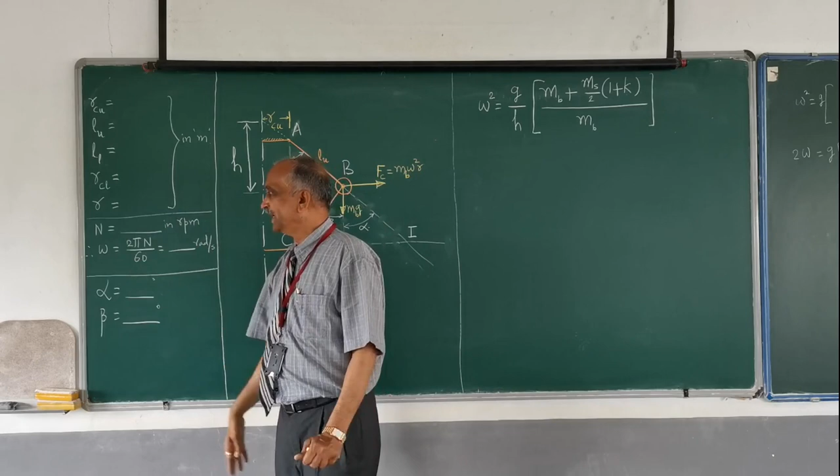I'd also like to explain how we can solve a problem in general, without specific values. I expect you all to write the given values when solving a problem in terms of meters. N is in RPM, it may be given or asked, and the relationship between N and omega is as you all know, represented this way.

You also have two angles, alpha and beta. Alpha is the angle made by the upper arm with the spindle axis. Similarly, beta is the angle made by the lower arm with the spindle axis. So if the length of the upper arm and lower arm, and RCU and RCL, are equal, then alpha is going to be equal to beta.

But I'd like to make this analysis as general as possible, so I assume all of them are different. When you start solving a problem, it may often happen that LU equals LL, RCU equals RCL, etc. In that case alpha equals beta. Don't worry about it.

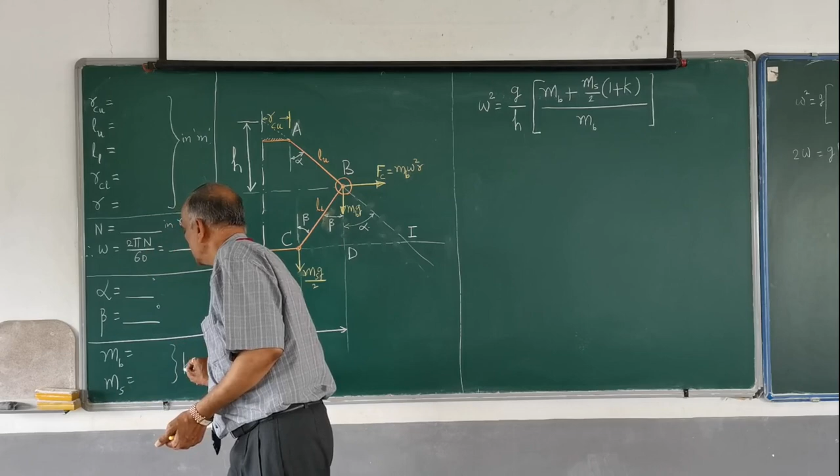In addition to this, you also have what's called mb, the mass of each ball, and what's called the mass of the sleeve, ms. Both of these are in terms of kg.

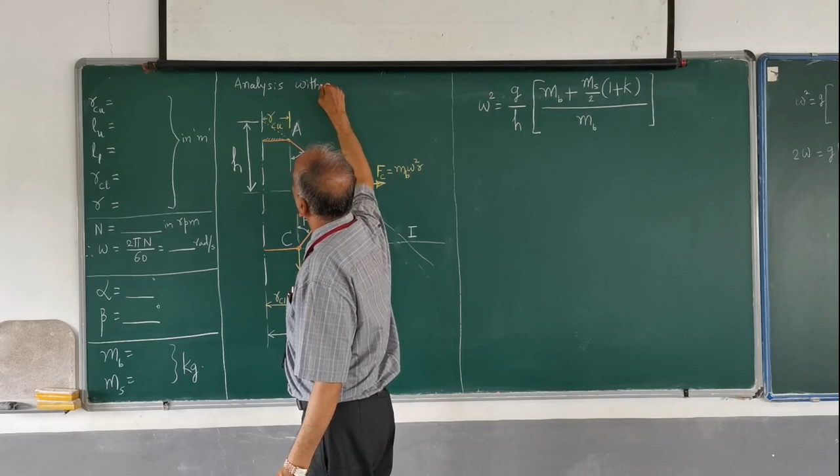Whatever the analysis, this is what I'm calling analysis of a governor without friction. So I am not considering friction right now, and if I don't take it into account, how the analysis is to be carried out - that's what I want to demonstrate.

Along with this, I've also shown the various forces that act. You have a force called centrifugal force, which is equal to m into omega square into r. Then you have the weight of the ball acting vertically downwards, equal to m into g. Then you have the sleeve, of mass ms, and the weight of the sleeve is ms into g, which is imagined to be acting at the axis.

I want to resolve this into two parts, one component here and another component here, and I can imagine that these two components are equal, and that is equal to Ms into G divided by 2. So this is the sleeve force weight, this is the weight of the ball, and this is the centrifugal force. So these three forces are acting, and under these three forces these balls are revolving at a constant radius r.

These balls, with respect to the horizontal movement in the plane of rotation, are constant, fixed in the sense that this R value is not changing, and therefore I can say that it is in the equilibrium state, and I would like to apply the equilibrium condition.

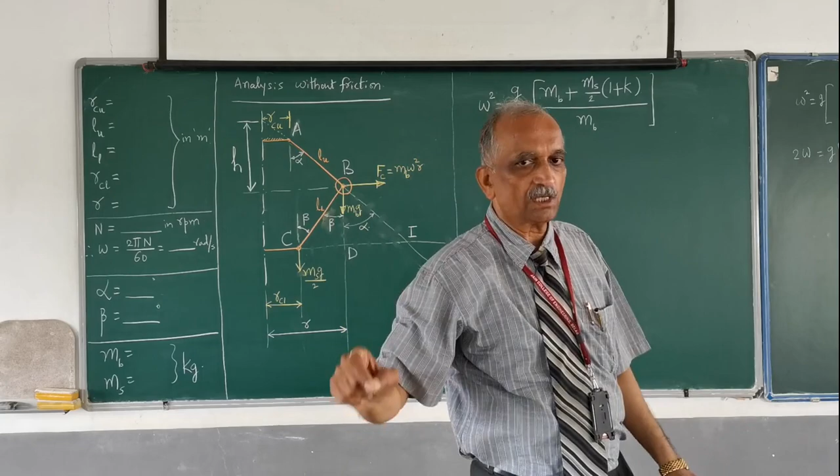So what is the height of the governor? You cannot measure it directly, it has to be calculated. As per the definition, the height of the governor is nothing but the distance of the intersection of the upper arm with the spindle axis. That is nothing but this point. You have the upper arm here, you extend it till it intersects, and this is the point. The distance of this point from the plane of rotation of the balls is what is called H, the height of the governor.

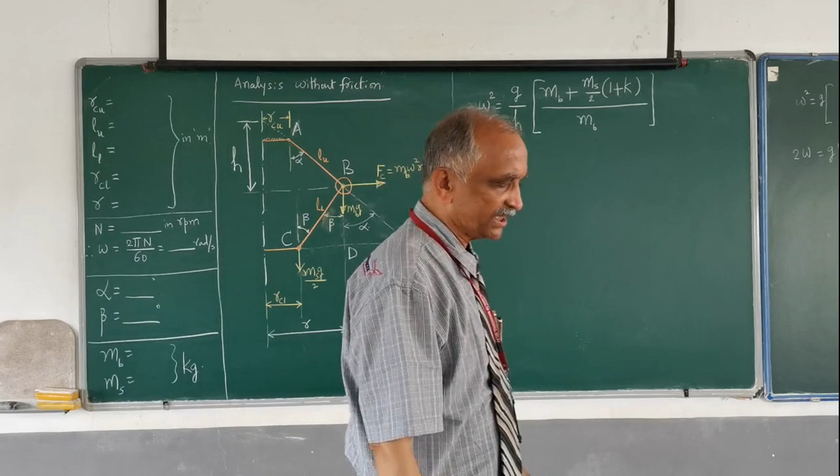So this is how we have got the relation between omega and H and Mb, Ms, etc. I don't intend for you to use this ready-made expression for every numerical problem; you can analyze it this way. But even if you use it as a ready-made formula, please remember this formula is for this figure, and also remember this diagram.

Whenever you solve a problem, usually some data related to this is given, and one of them is unknown, and that's what you normally have to find. So let's say omega is unknown. Then I would like to find G, which is the acceleration due to gravity, and H, the height of the governor. So let me postpone that.

I shall find out what is called alpha. So go back to this diagram and make use of this triangle.

If I write an expression, sine alpha is equal to this value. And what is this value? That is nothing but the radius of rotation minus this value, which is RCU. So sine alpha is equal to R minus RCU divided by LU. This will give you sine alpha. Knowing these values, you can find sine alpha, and from that you can easily find the value of alpha.

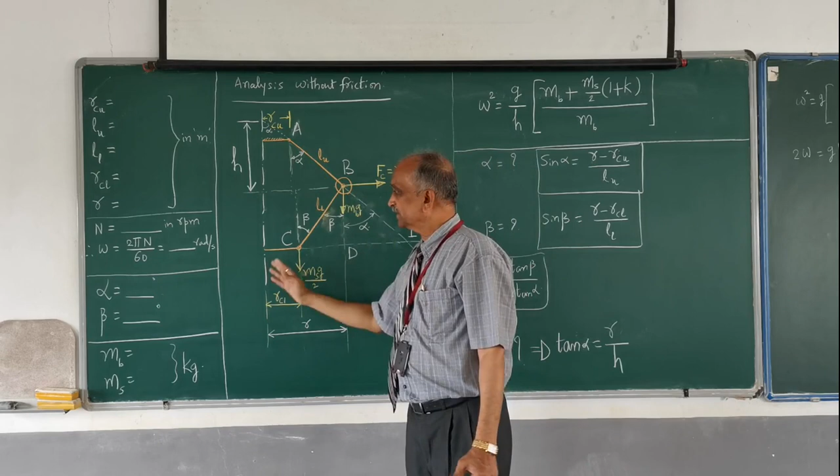So what do I mean by equilibrium speed? Because I presume that the load on the governor, the load on the engine is constant, and therefore the engine is running at a constant speed, and the governor engine shaft is connected to the spindle of the governor, and therefore the governor spindle also is running at a constant speed, and therefore what is that speed? That speed I call it as equilibrium speed.

Please remember, this omega is what I call the equilibrium speed of the governor for this radius or for this position of the sleeve.

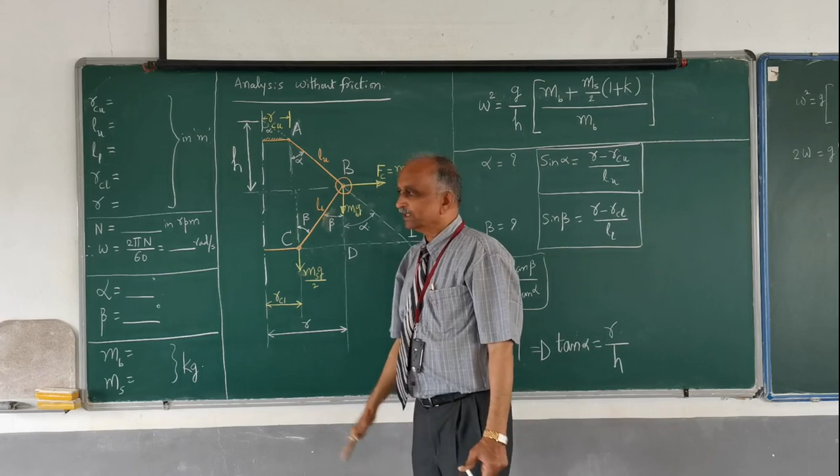Remember, as the load on the engine changes, its speed changes, and the speed of this governor spindle also changes, and as the speed changes, the centrifugal force on these balls will change. Then accordingly, if it is more, the ball will move out.

If the ball moves out, remember this end cannot move at all, this end is fixed. When this moves, automatically the sleeve has to be lifted up, the sleeve has to go up. And similarly, if the speed comes down, the balls come inwards, the sleeve comes downwards.

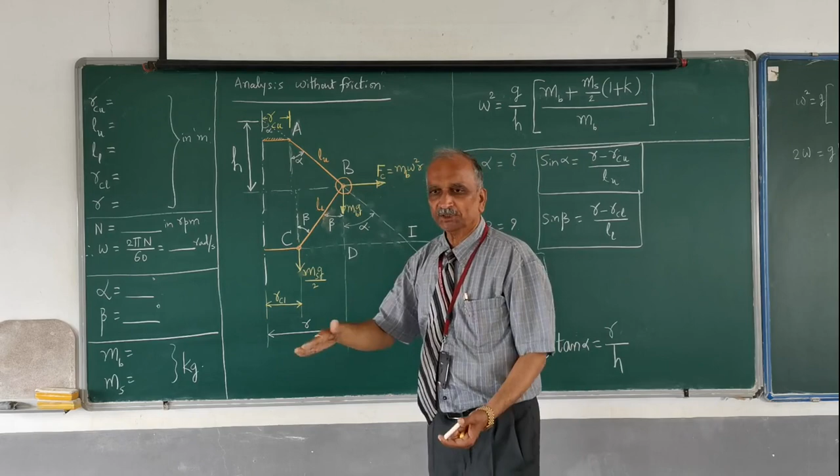Okay, so depending upon that, whatever the diagram I have shown now, I shall presume that the sleeve is not in the lowest position or not in the topmost position. You have certain limits. The sleeve cannot go below the lowest position.

As I say, this goes down as the speed becomes lesser and lesser, so this ball goes inside and the sleeve comes downwards. There is a limit for that position, and that lowest position of the sleeve, at that time the speed is going to be the lowest.

Let me call that lowest speed as omega 1. At that time the sleeve is at its bottommost position.

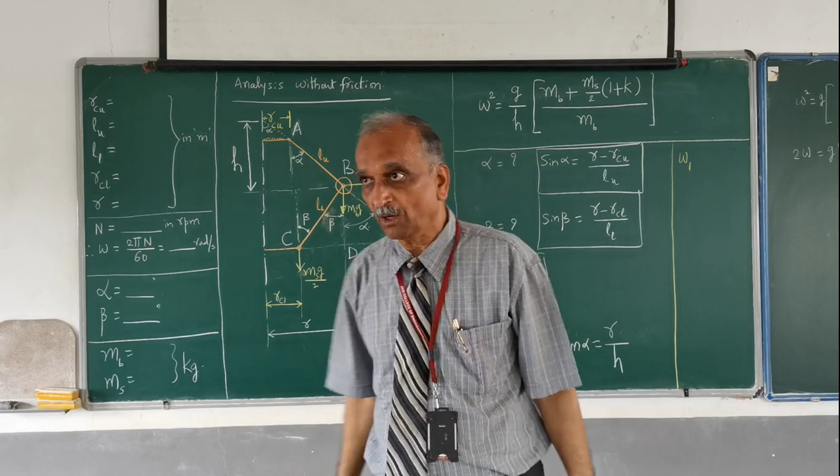And similarly, when the speed increases, the balls move outwards, and then the sleeve goes on moving, and it reaches the topmost position, beyond which the sleeve is not allowed to move up. That I call the maximum position, and that speed I call omega 2. So omega 1 is the lowest speed, and omega 2 is the highest speed.

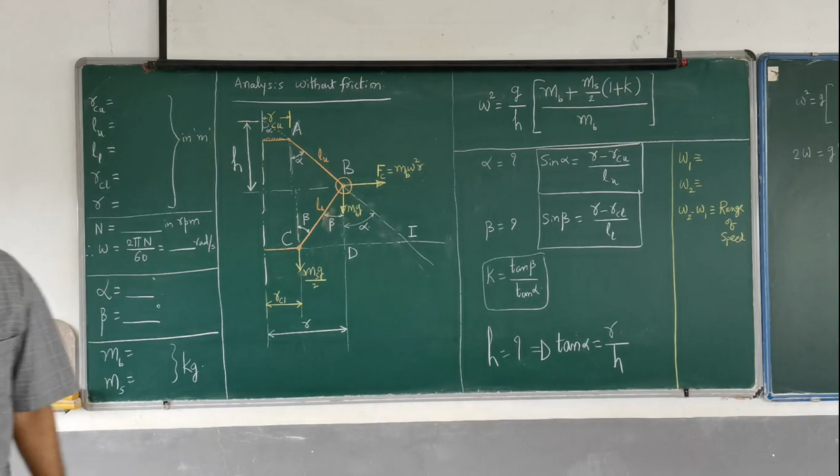And usually this omega 2 minus omega 1 is called the range of speed. And whatever range of speed I find out in this way is called the range of speed without considering friction, and that's what you find out as omega 2 and omega 1.

So please remember, when the sleeve position is different, say at its lowest position, the values RCU, LU, LL, RCL don't change. So whether the sleeve is at the bottommost position or the topmost position, these values remain the same. But some of the values change. The value of R will change. So those values I call them as, say, for the lowest position.

For the lowest position, I have what is called alpha 1, beta 1, and R1. These are the values, and for that, you find sin alpha 1, sin beta 1, then K1, then H1, and that is how you find out what is called omega 1.

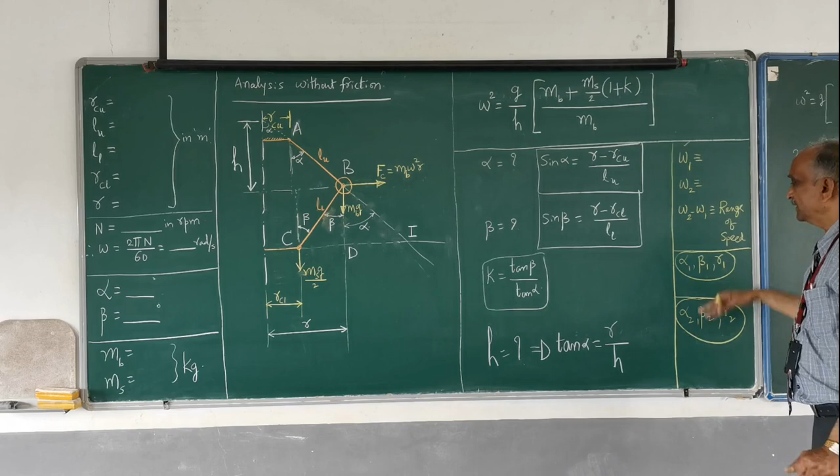Similarly, when the sleeve moves to the topmost position, I have what is called alpha 2, beta 2, and R2. Using this you find out what is the speed, and that speed is the topmost speed, the speed at the top corresponding to the topmost position of the sleeve, which we also call the highest speed of the governor.

So now you can use alpha 1, beta 1, R1, alpha 2, beta 2, R2 in general, corresponding to the lowest position and the topmost position. And if you are talking in between, I simply call it alpha, beta, K, and omega.

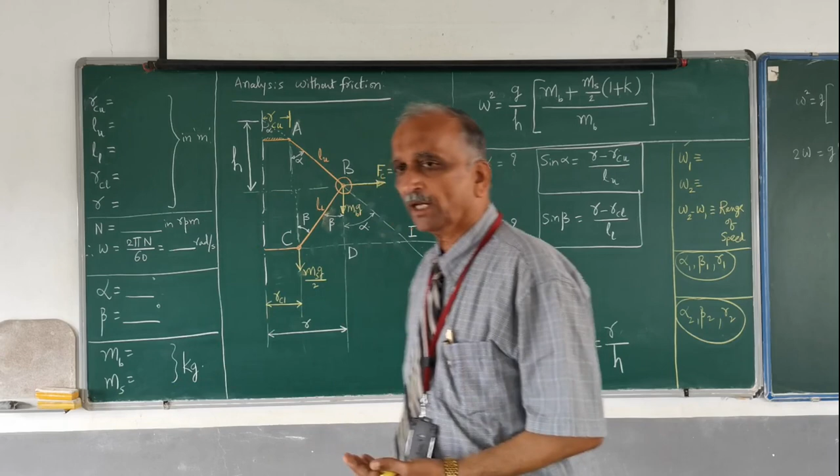One more thing which may be asked: what is the sleeve movement between the lowest position and the topmost position? This diagram corresponds to a position of the sleeve in between, not the lowest, not the topmost. When the speed increases, the sleeve goes beyond this, let me assume this is the topmost position. This movement is what is called the sleeve displacement or sleeve movement.

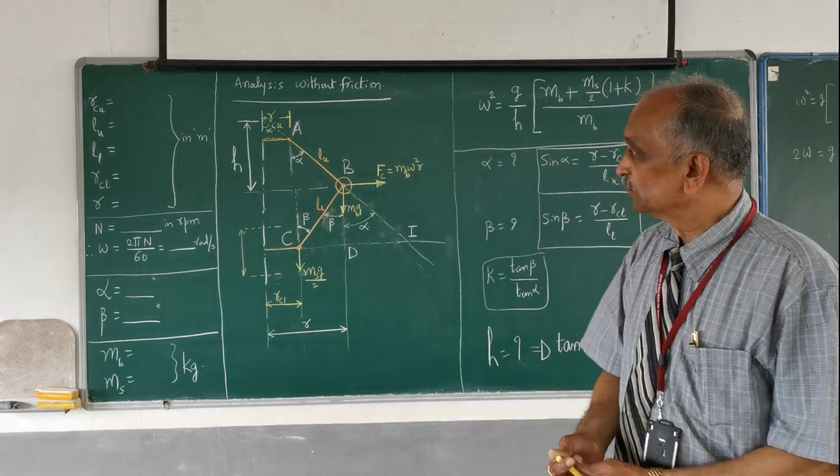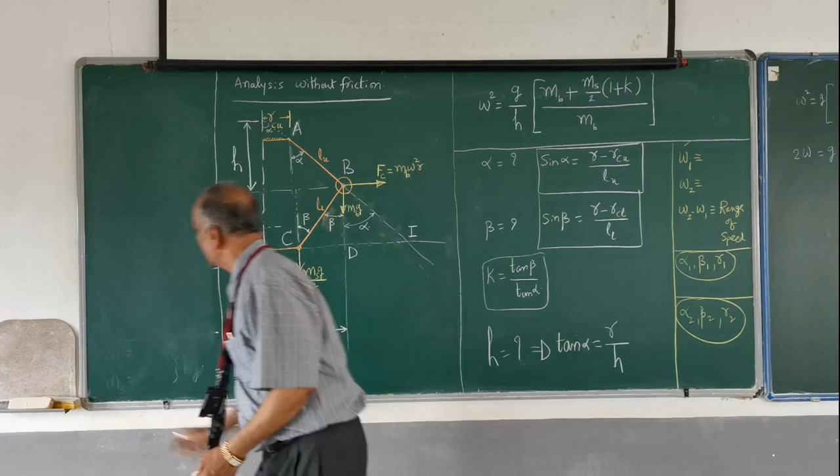So how do we find this position? If you want to know what is the sleeve displacement corresponding to the bottommost position and lowest speed, and corresponding to the highest speed, how much the sleeve is going to move, you need to calculate it. So the sleeve is at the bottommost position.

Please remember this point is fixed. So I would like to measure the distance from here to here, and then I also measure this distance. The difference between this distance and that distance will give you the sleeve movement.

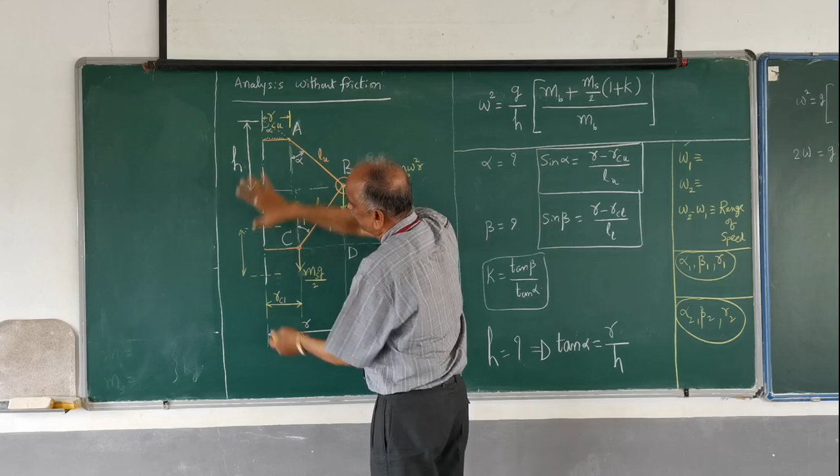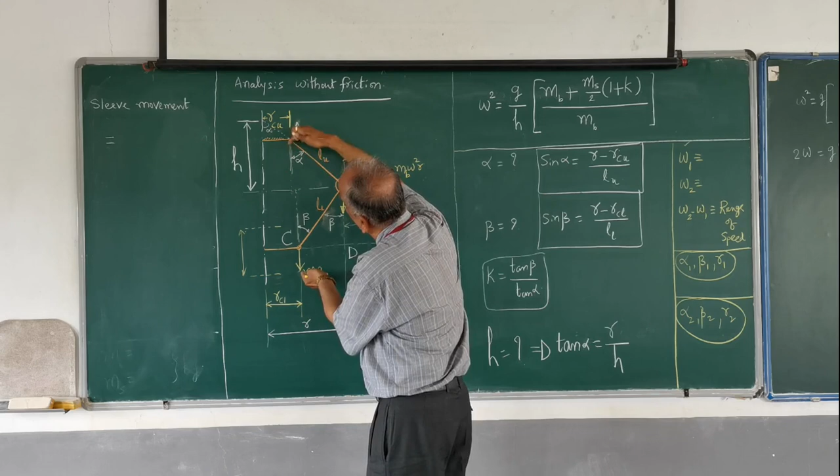So the sleeve movement or sleeve displacement is equal to the distance from here up to the lowest position. What is this distance? This is nothing but LU cos alpha, corresponding to this lowest position, and that angle I call alpha 1.

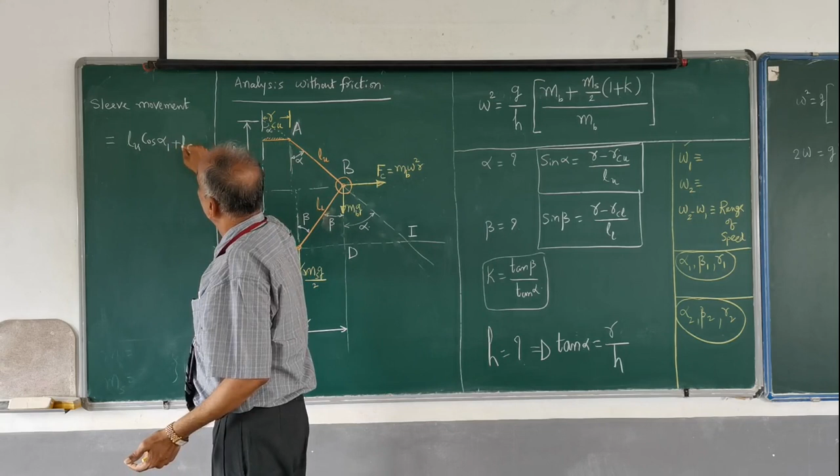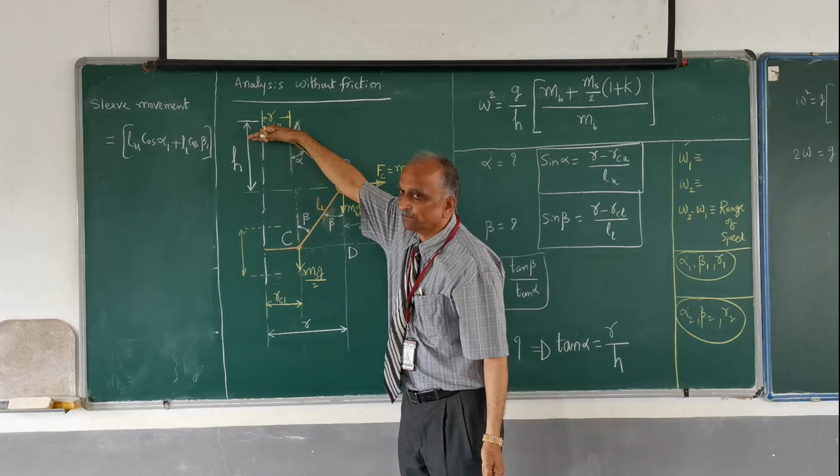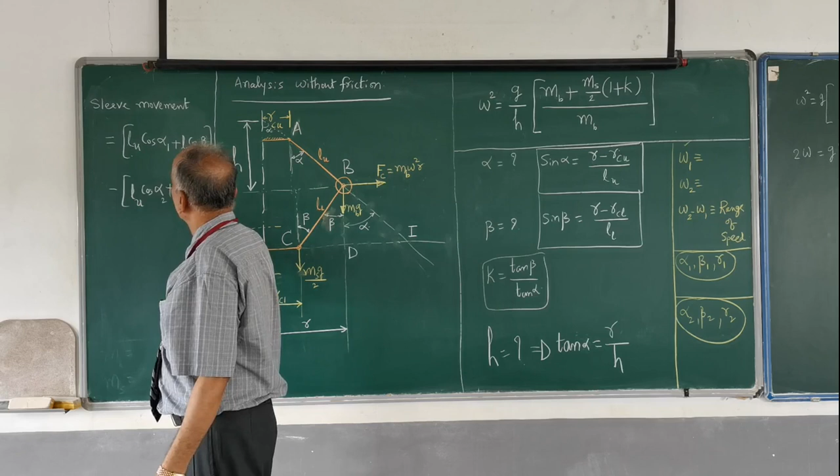LU cos alpha 1 is this distance, and this distance is nothing but LL cos beta 1. This will give you the position of the sleeve from the upper fixed end of the column. Minus the similar distance corresponding to the topmost position: LU cos alpha 2 plus LL cos beta 2. This will tell you what is this distance.

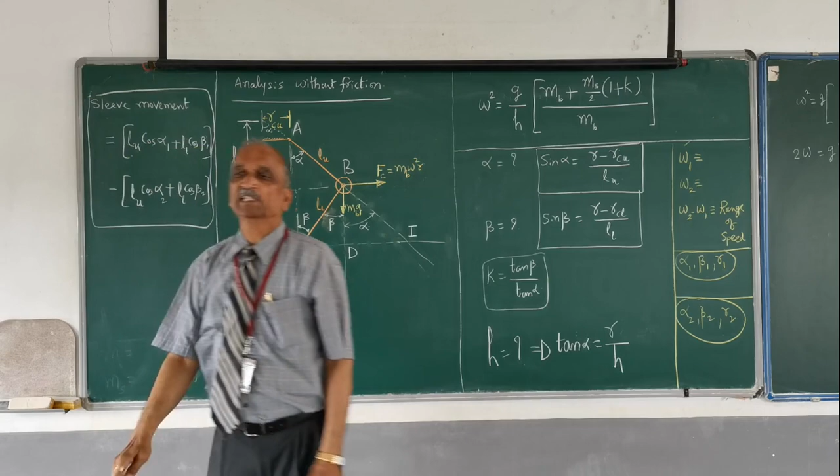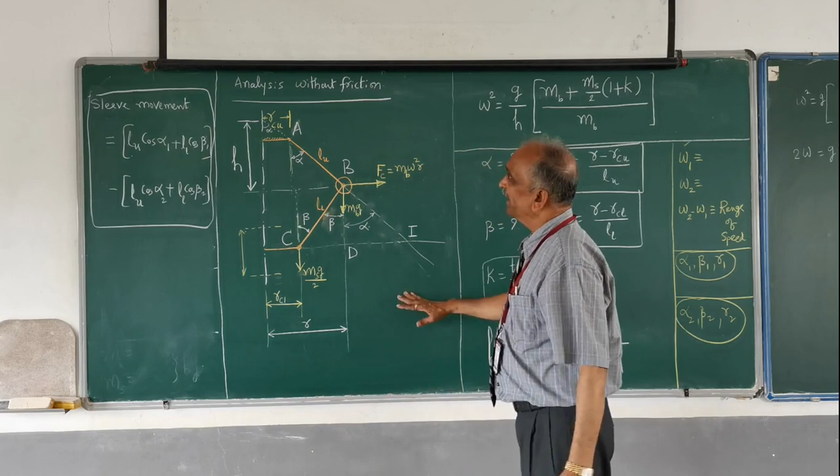If you calculate this, it will tell you what is the sleeve displacement. I hope you will be able to solve your problem using this, to find how much is the sleeve movement, etc. My next class will be more of a repetition of what I did in my previous class, but I hope now everything is clear.

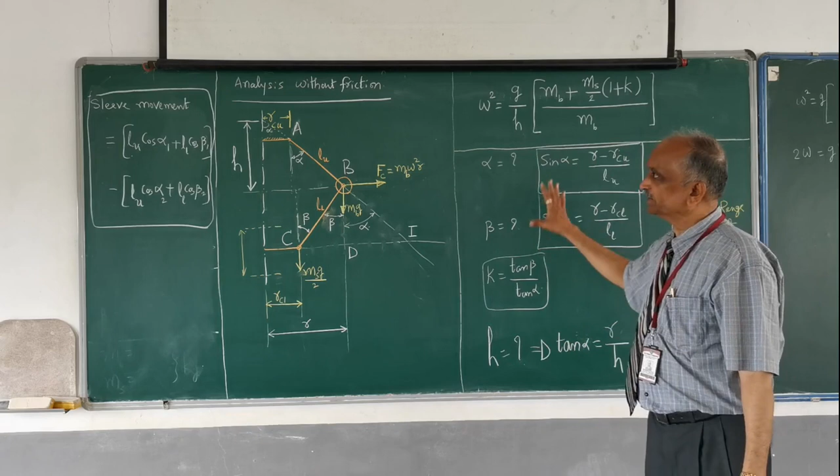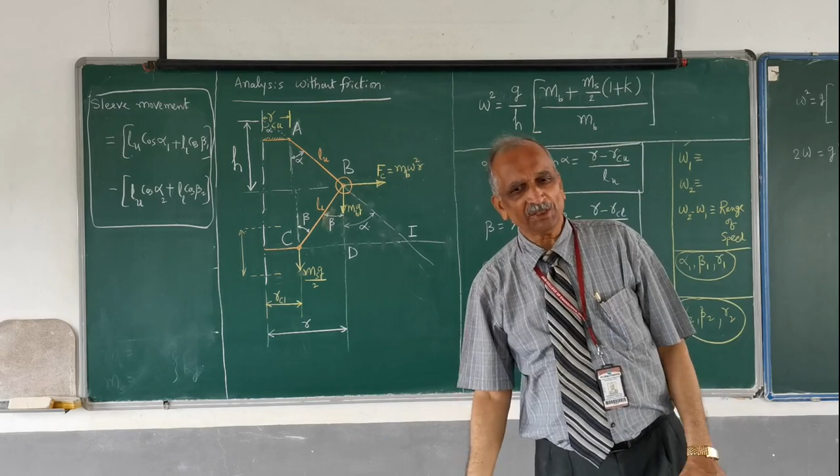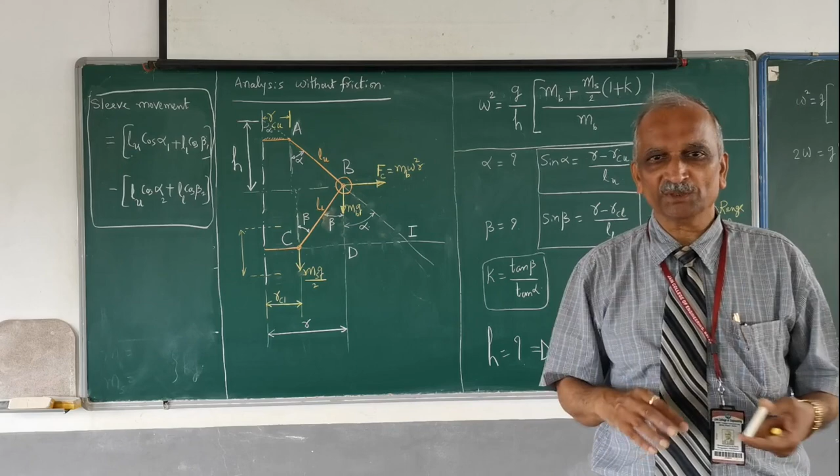What will be the effect of friction, that I am going to discuss in my next class. You all know that if anyone doesn't bother about all the effects on him, we normally call him an insensitive person, not responding to anything. A similar thing happens here: if I have friction, then the governor at any position becomes insensitive for a certain range of speed. That's what we call the governor becoming insensitive when I take friction into account, and how much that is, I shall discuss in my next class. Thank you.